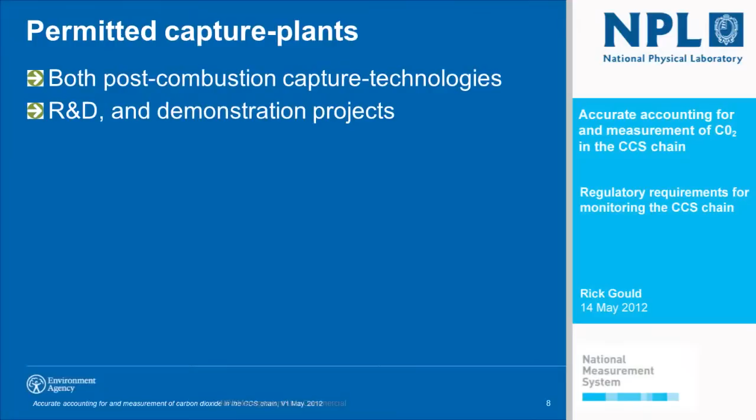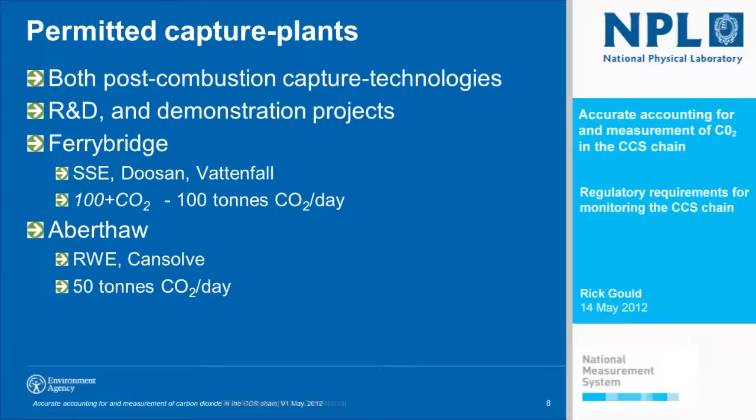Two plants in particular: there's one at Ferrybridge, which is owned by Scottish and Southern Energy, and they're involved in a joint venture with Babcock Doosan and Vattenfall from Sweden. You may have heard of that, it's called the 100 plus CO2 project, in that it's designed to capture 100 tonnes of CO2 per day. And then there's Aberthaw in Wales, which is operated by RWE, and they're in a joint venture with Cansolv, which is part of Shell. That plant is roughly half the size, in that it's designed to capture 50 tonnes of CO2 a day. And these will tell us a great deal about degradation and capture efficiency.

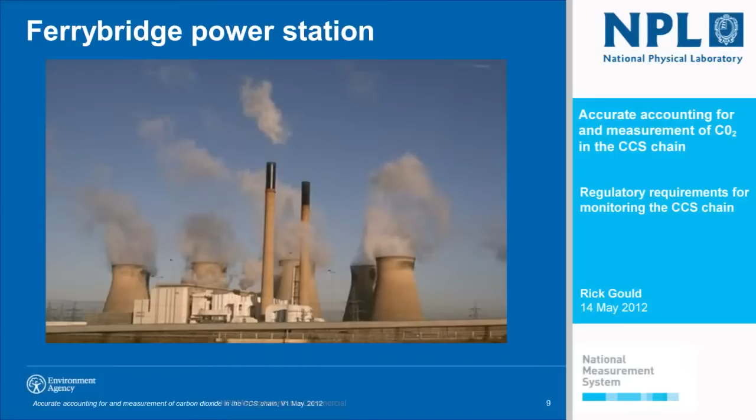I've shown that slide deliberately just to give you an idea of the scale of the plant. It's about 2 gigawatts, and in the foreground you can see the very large flue gas desulfurization units, and they don't look very big there because they're dwarfed by the 200-metre stacks. But behind those, there's a carbon capture unit, which is capturing about 1% of the CO2 from the plant. So if you can imagine scaling that up to full size, it just gives you an idea of the challenges of making these things full size.

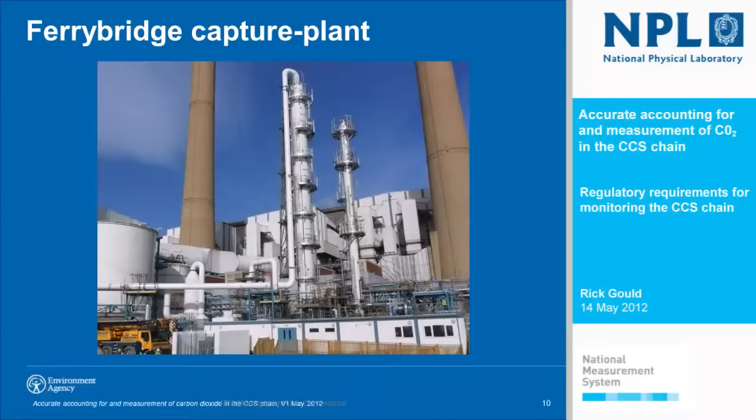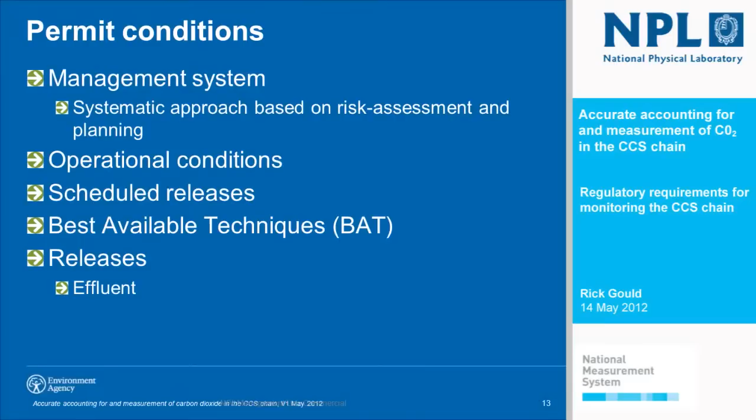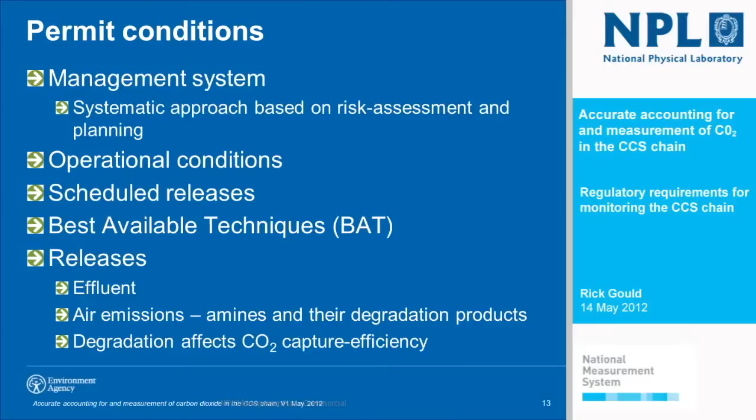That includes operational conditions and scheduled releases, or what is allowed to be released as a maximum emission. And we expect the application of best available techniques, and the permitted releases cover effluent and air emissions, and in particular amines and their degradation products. That's relevant for two reasons. I think one is that some nitrosamines, for example, are carcinogenic, but mainly in terms of, say, the EU ETS, degradation means that the capture efficiency is going to be reduced. So we need to know what that is in order to include that in carbon accounting.

The monitoring requirements we have are that generically we require certified or proven monitoring systems where they're available, and a hierarchy of standards. That's down from CEN to ISO national and other national and international standards. We're missing a few, I think, specifically for carbon capture and storage, but they will happen, and there's plenty of action happening underfoot to make sure that we do have those standards.

And then in terms of applying them, we require test laboratories to be accredited and to apply test methods that are in their scope of accreditation. And there's other standards that apply to the quality assurance of monitoring as well. We know by applying these that the accuracy and precision of any test methods applied are going to be as good as they can be. We apply all of these in the UK through the Environment Agency's monitoring certification scheme, which is really nothing more than just a way of packaging international standards and proven equipment.

If we look at the carbon capture and storage chain, the example here is for post-combustion capture technology using amine scrubbers, and it's not new at all. I think the technology's been around since the 30s. It's been used at a coal-fired power station in California since 1978, not for looking at climate change, but simply to capture CO2 for use as a feedstock. So we've got lots and lots of experience, and we know what a lot of the problems are.

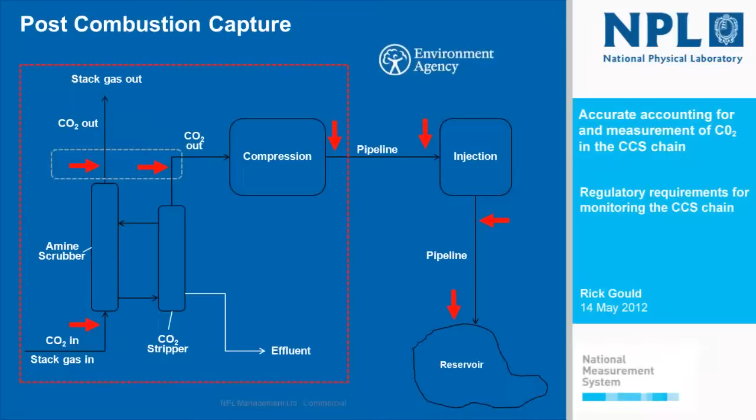Oxyfuel combustion, which is the other one that I would put my money on at the moment, it's a very similar story in that we're looking at the inputs and outputs and looking at a combination of monitoring and mass balance models and using the experience we've got to try and produce the optimum monitoring program.

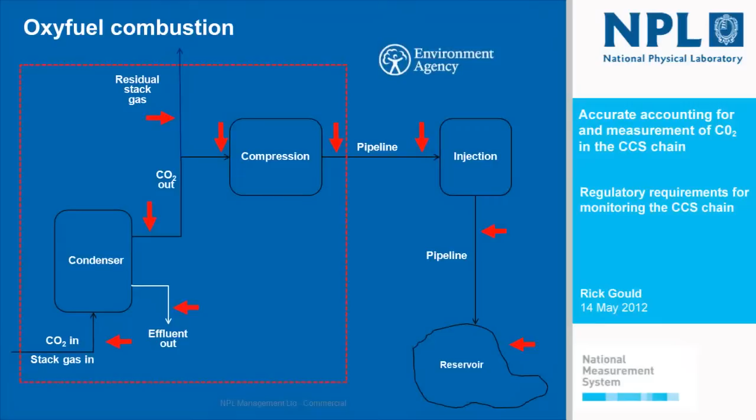We've seen a bit of legislation. I think one to watch is the new monitoring and reporting regulation that's being written and refined as we speak. And in theory it should be published this year, and that consolidates a lot of what we know already. Without going into all the equations, in very simple terms, we look at the CO2 that's captured, and then we have to subtract the CO2 released.

And what we'd want people to do is focus on the highest risk points of release, so that we're not trying to monitor absolutely everything, because from what I've heard this morning, I just don't think it's going to be practical, and I don't think the cost benefits are really going to give us that much in return, but there is a minimum we will need to do. So I think what we should know is how we can apply the 80-20 rule at the end of all the different research programs we've heard about.

That equation is going to be underpinned by monitoring and valid calculation procedures, which themselves are quite often supported by monitoring. The new guideline or regulation talks about using mass balance or monitoring individual sources. I think what we see is a combination or a lot of mass balance work with, say, periodic verification by monitoring.

The new regulation also includes requirements for continuous emission monitoring systems, and I think the most likely thing we'll see is monitoring for CO2 going into a capture unit and coming out of that capture unit, so that we can look at the efficiency continuously. We may be able to look at things, say, such as ammonia, which is relatively easy to monitor, and perhaps total organic nitrogen, and measure these things continuously, and that gives us an idea whether the efficiency is being maintained.

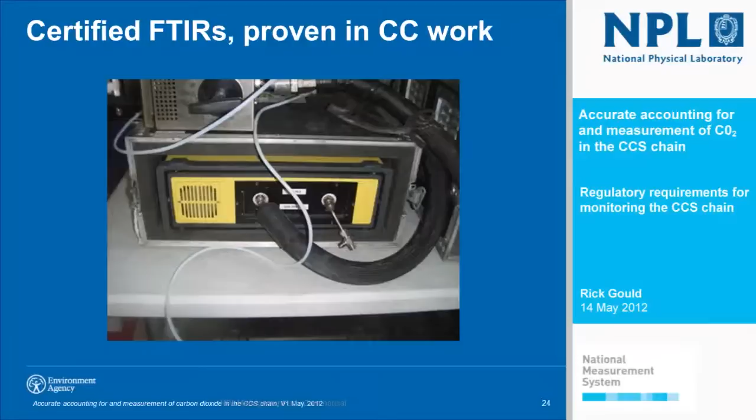And again, in terms of degradation products and capture efficiency, we know that there's certified systems that have been proven in carbon capture work. So in terms of tools available, we're actually quite confident we've got a lot already, both in terms of continuous monitors that can easily be extended to this field, and test laboratories as well. I mentioned EN 14181, which is the standard for quality assurance of continuous monitoring systems. That is prescribed in the new M&R Regulation.

And this is something that I scribbled a few years ago to explain what 14181 was about to some relatives, because if you've looked at the standard, it's not really written in English, it's more technical speak. And we were just having breakfast, and I got the back of a Shreddies packet and wrote this down, and I said, "So do you understand it now?" And my relative said, "Yes, but I think people that write standards should eat Shreddies more because it's a lot clearer that way."

And in very simple terms, it says that you should buy some suitable equipment for monitoring that's proven, and that's called Quality Assurance Level 1. It has to be set up correctly in the right place, it has to be calibrated, and then you ensure it stays working correctly. And this is all bound up in levels of quality assurance known as QALs, and there's an annual surveillance test as well. But the underlying principle is a risk-based approach based on planning and avoiding problems before they happen. And we know that the uncertainties that are specified are quite easily achieved when applying this. So I think this is a reason why it has been applied to emissions trading.

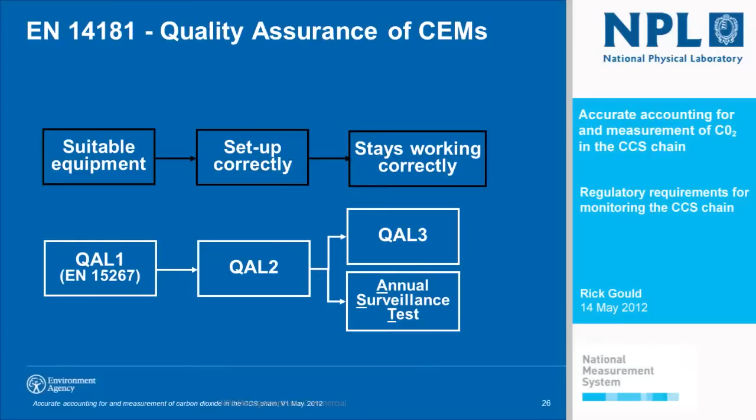And as we speak, it's probably being used right now for the Clean Development Mechanism; the N2O abatement plants have to have CEMS, and these CEMS have to be quality assured using 14181. So there's a lot of experience already in applying these standards to emissions trading. And as I mentioned, we apply them as well to SO2, NOx and particulate trading.

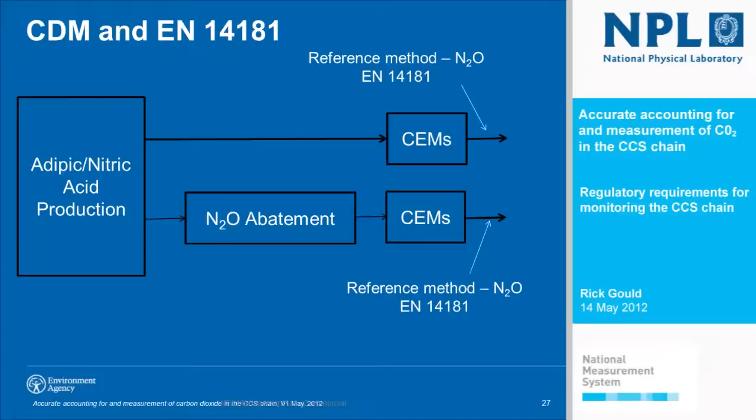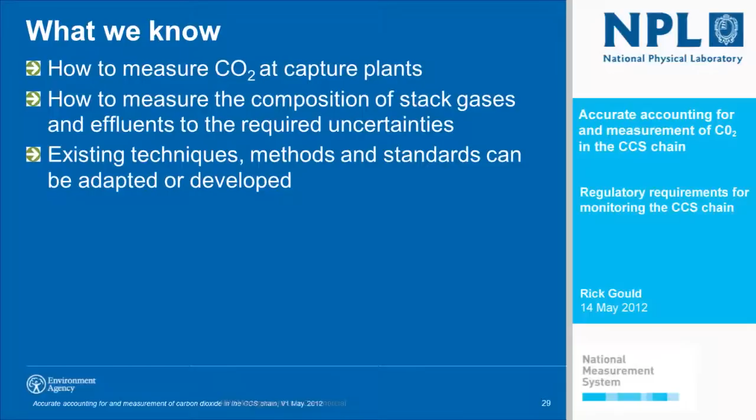So just to sum up what we know: we know how to measure CO2, and we know how to measure the composition of stack gases and effluents to the required uncertainties. And that's in terms of the individual tools and techniques and equipment that we can use. If we haven't got everything we need, we also know that existing techniques, methods and standards can be adapted or developed based on past experience.

We also know that monitoring with CEMS and applying 14181 does work for emissions trading, because we're doing it now and we have done it. But also we know that amines can degrade, and that will in turn degrade the capture efficiency of capture plants, which again will have a big impact on allowances and trading.

We also know who will regulate most parts of the CCS chain, but it's just a case of deciding what the details are in terms of pipelines and what role exactly, say, onshore regulators will have offshore. We also know how to measure flow in liquids and gases, and we've heard there are challenges ahead, and I'm sure we'll find a way of solving them, perhaps not tomorrow, but based on experience we will do.

We've also got a lot of experience of measuring flow in liquids and gases in other fields, and certainly in monitoring. What we've done is look at what people have done elsewhere and adapted those to what we need. The known unknowns is exactly how we'll tie this all together in an integrated procedure for whole system CO2 accounting. And as I mentioned, there'll always be a residual risk, and it's a case of just deciding what we can live with and then including that in any accounting. And I'm sure, based on our experience, that uncertainties will get lower as time goes on.

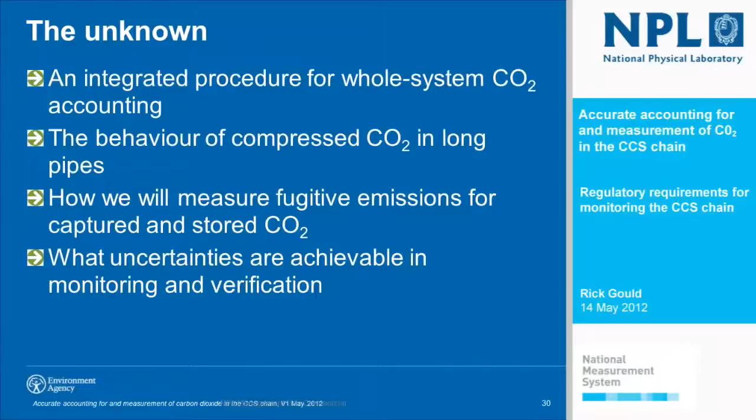We also don't know how CO2 behaves or doesn't behave as we want it to in long pipes, and that's an unknown, and it'll be a case of looking at the lowest risk and how to deal with that. Also, we're not sure exactly how we're going to measure fugitive emissions for captured and stored CO2, but we are developing those techniques. And finally, we're not sure exactly what uncertainties will be achievable in monitoring and verification, but we will find a number, and we'll have to apply it until we can better it.

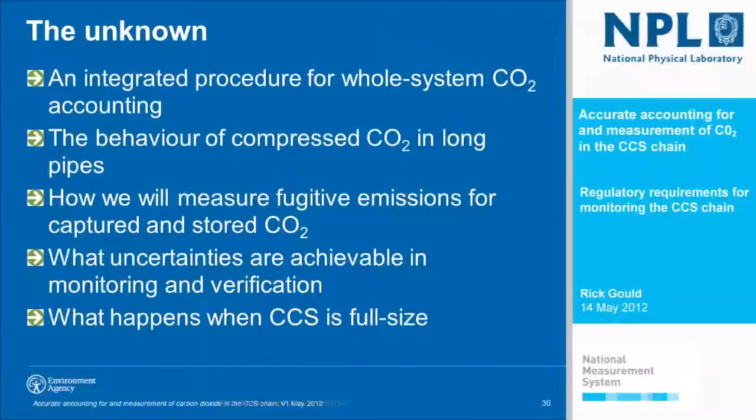I think probably the biggest question, going back to the earlier slide, is what happens when we scale this up to a full-size plant, because we really don't know exactly how it will behave, because we've quite simply not done it before, but we will do it in the next 5 years.

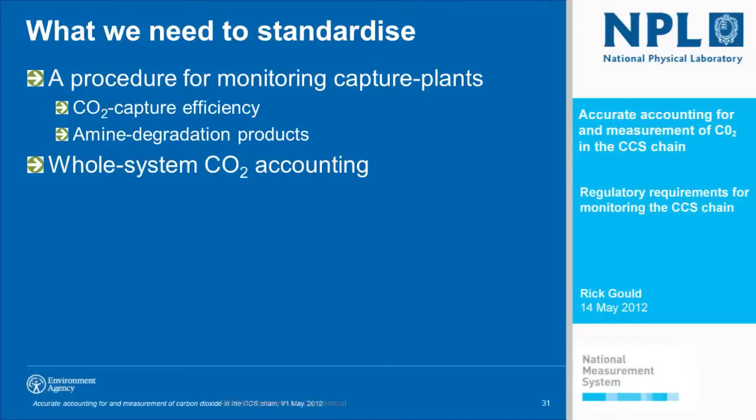And then to really keep uncertainties low, we need more standardisation, and that's a procedure for monitoring of capture plants, that would be the capture efficiency, and related to that, any amine degradation products. We need a procedure for whole system CO2 accounting, and flow monitoring for gases and liquids applied to carbon capture and storage and transportation. One thing that's been mentioned here is acceptance criteria for CO2-rich gases and what contaminants we can live with.

We already have some to go on from enhanced oil recovery and the specifications for those, but we haven't specified what that is. But I think we have certainly the bricks in place, if not the foundations. For example, we've talked about corrosive gases, and some specifications for moisture already range between 160 ppm and 500 ppm, depending on the pressure of gases and liquids and how cold they're going to be. So we know how to measure those, and we just need to apply what we've done so far in other fields to carbon transportation.